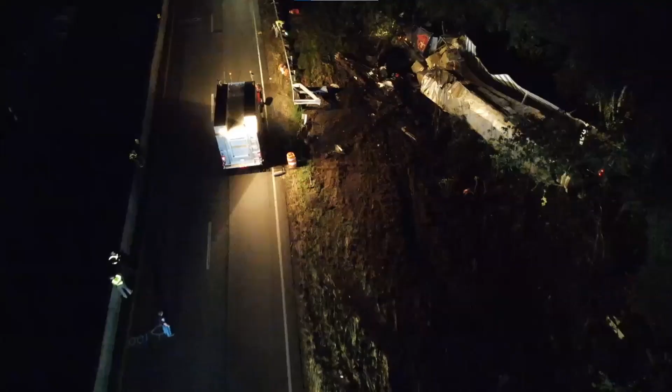Unfortunately, we had a dangerous work zone in Indiana back in the 2021 timeframe, and we looked at several crashes that happened in that geographical area. We had a bridge redecking that was occurring in that area, and the geometry of that site caused us to have several fatalities and serious crashes within a short timeframe.

This is one of the crashes where a semi ran off the right side of the roadway. Again, using UAS, we were able to go in there and within a 45-minute timeframe, collect all the images and accurately document that scene so that we could start on the recovery process and getting the roadway open back up.

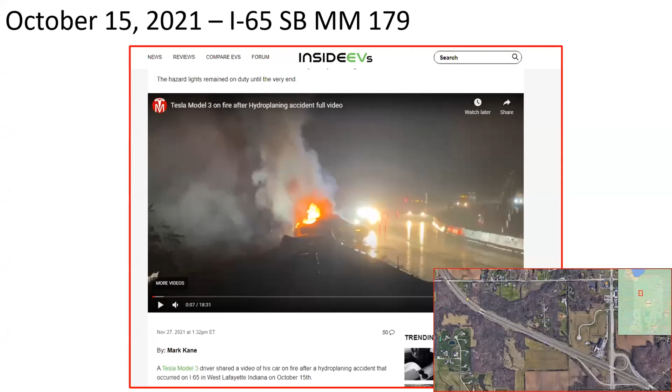Same evening as one of our incidents, after we had cleaned up that incident, a Tesla came into that construction area. It originally came in that they hydroplaned and crashed, or a vehicle fire. When we got there, we found out that the Tesla had entered that area - the navigation system got confused by the markings and struck the interior wall.

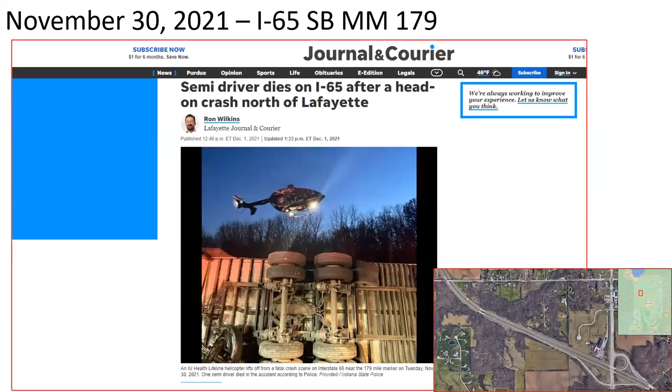Unfortunately, within that 2 to 3 month timeframe, we had several fatalities occur, all involving commercial vehicles, where we shut down that roadway for an extended period of time. Again, using UAS, we were able to quickly go in and document those large scenes very quickly, and then get in there and start the recovery process and start opening that roadway back up.

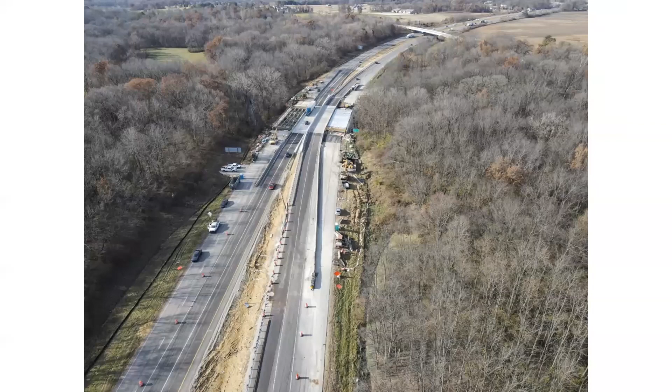So in using that, we obviously identified we had a problem in this area. We went out and flew that particular area in conjunction with the Department of Transportation and Purdue University's research program.

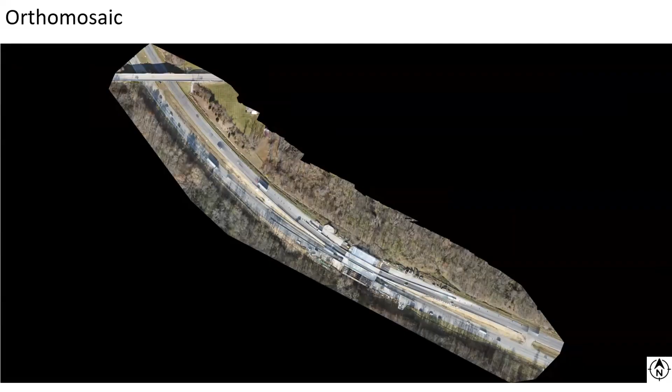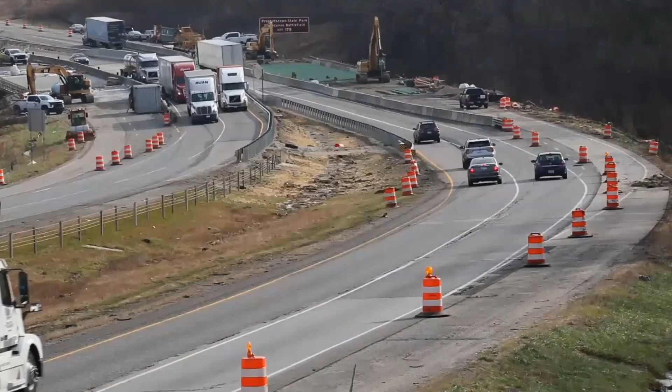We flew that area and mapped that scene as it was. This is a scene of how traffic was flowing through that particular area. We had a downhill left-hand curve going into a restricted bridge area. You can see how the semis are passing very closely as they come into that restricted area.

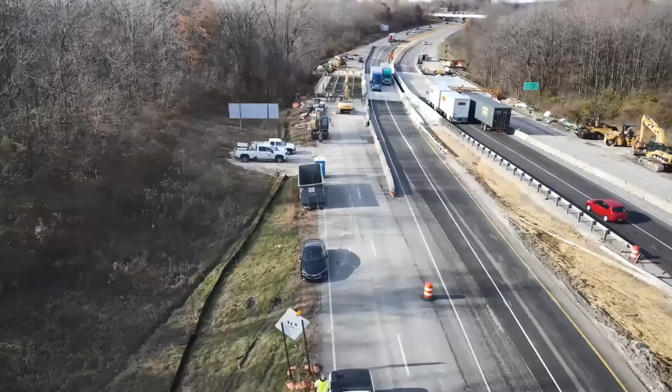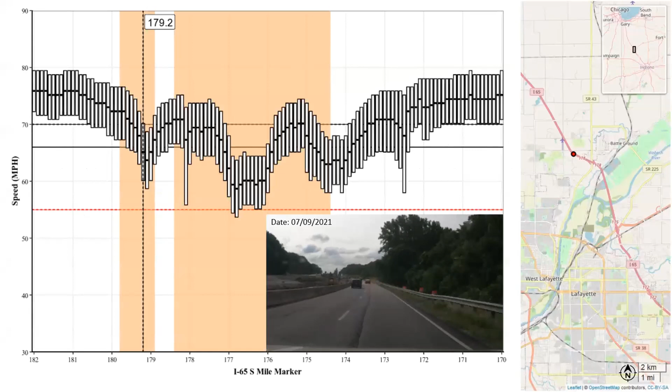So Purdue sent a LiDAR vehicle through there, using both the connected vehicle data and our UAS imagery, to then overlay that hard braking data.

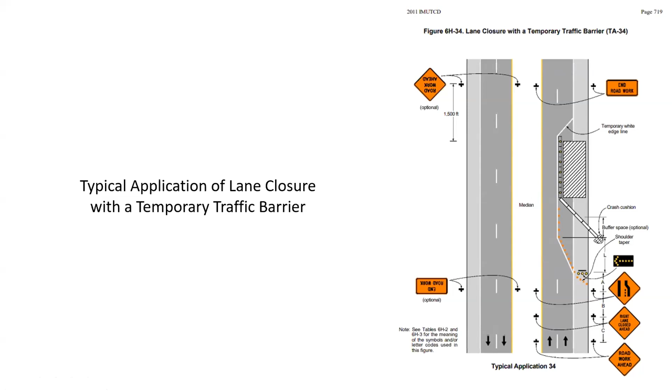As we know, the typical applications for lane closures and temporary restrictions or barriers for bridge redecking in those particular areas use standards that are typically used in the construction area. But what we were able to do is actually use the UAS flights to go in and document how the actual scene was, or how that area was.

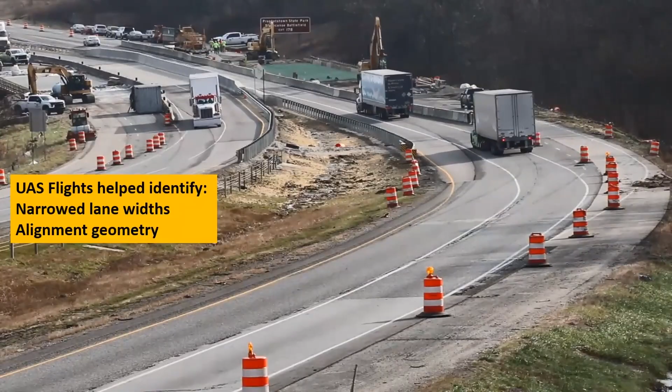Through that, we were able to identify that we had narrowed lane widths that had gone past what the restrictions were set up for, and they identified alignment geometry issues with that particular zone.

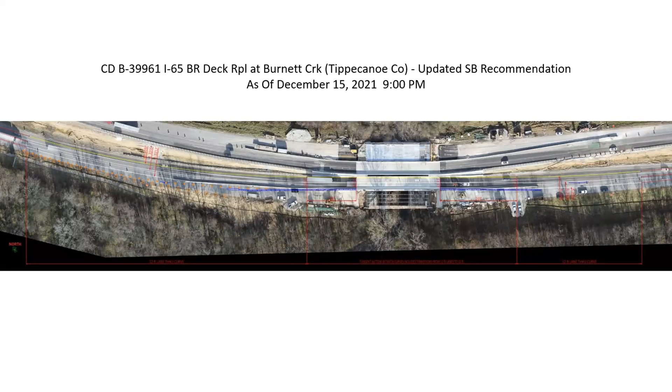So again, for the redecking, INDOT got with the contractors, looked at this information, and came up with recommendations that they implemented on December 15th for correcting some of the issues that they had identified.

One of the main things they looked at was the approach and transition into that bridge decking area. They realigned the traffic so drivers were coming into a straighter, lessened approach, as opposed to the severe curve they had experienced coming directly into that area.

They also improved the lane widths. They had found that the contractor had made the lane widths narrower than what had been allowed, and they corrected the lane widths to a 12-foot lane width through the curve area.

They improved the lane markings. The barrel patterns had initially been set out along the shoulder of the road, so they went in and added that visual barrier, that visual cueing for the drivers, and realigned the barrels so they followed the fog line or shoulder area more accurately into that transition.

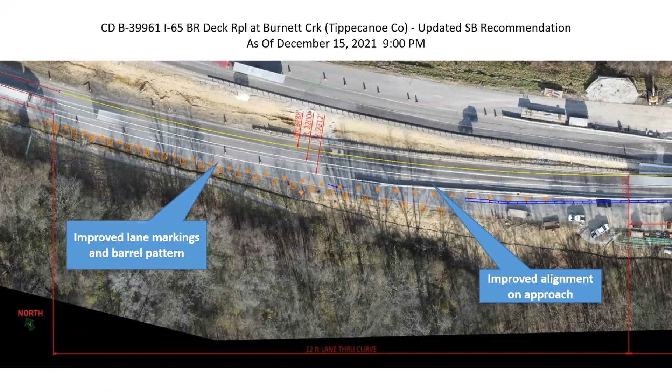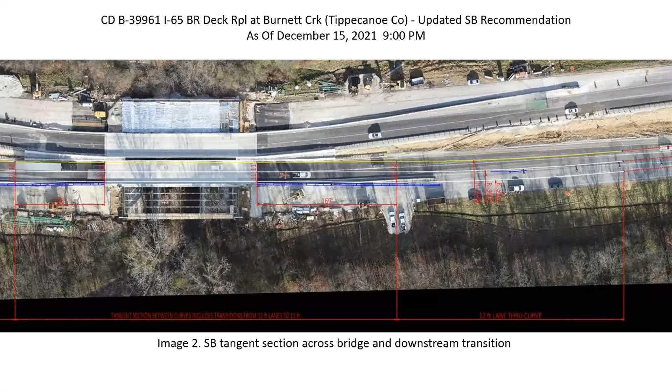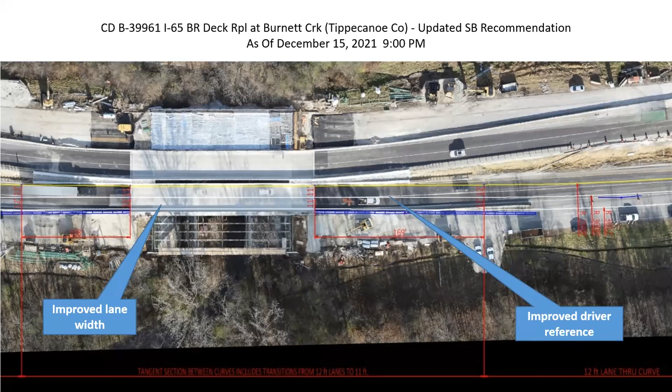They also looked at how the exit out of that area was. They looked at the section of bridging as they come across and then go into that downstream transition, again improving that lane width and giving drivers more of a visual reference as they navigated through that area.

We saw the results of that combination of UAV flights and hard braking overlay data — we had an immediate reduction in crashes, and that reduction continued through the entirety of the project.

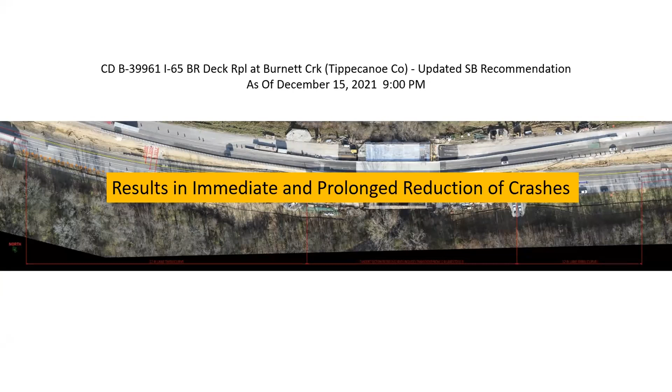So we looked at that model and asked, how can we use this in our other areas? The state has identified six major construction areas throughout the state of Indiana.

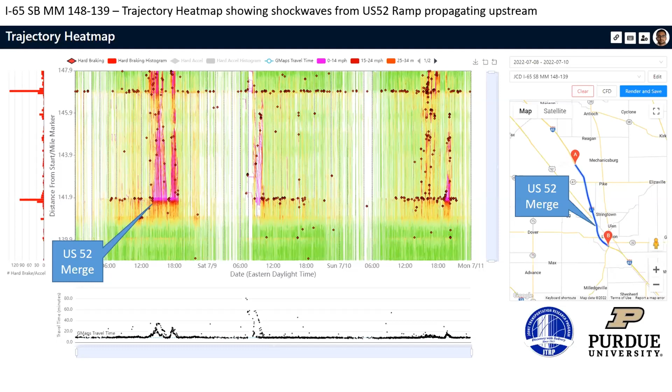In those areas, we've looked at the hard braking data associated with those construction sites. If they see a high incidence of hard braking or reduced speeds in those areas, Purdue will take this heat map data and identify where we need to go out and fly.

So we will go to those areas and fly them as the site is laid out, so that they can look at the geometry of those areas as well as overlay their hard braking data associated with that.

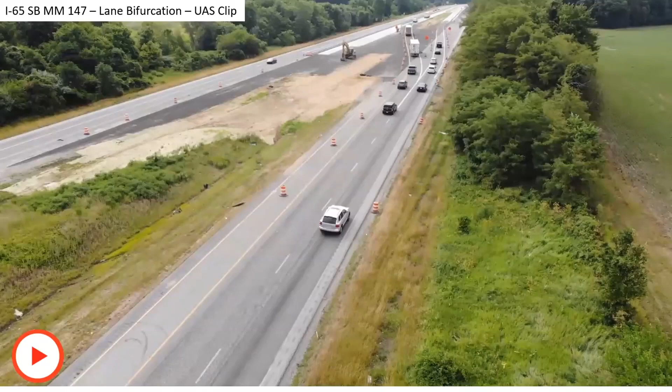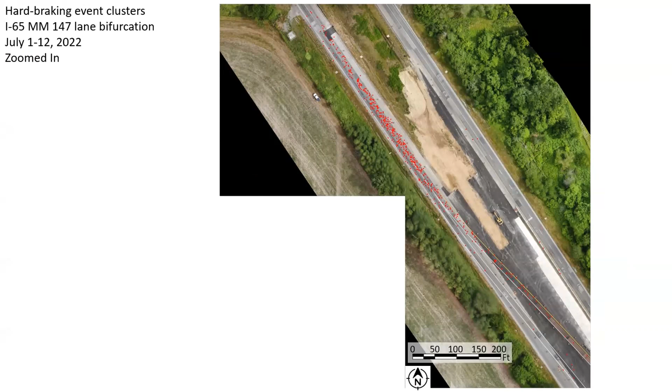So we began to analyze that. The nice thing about doing UAS flights is we get exact geometry, as opposed to using a satellite image from Google or other map sourcing. We're able to go in and actually fly the site as it's laid out and see where those events are occurring in relation to the true geometry of the area. In this particular area, we had the bifurcation area.

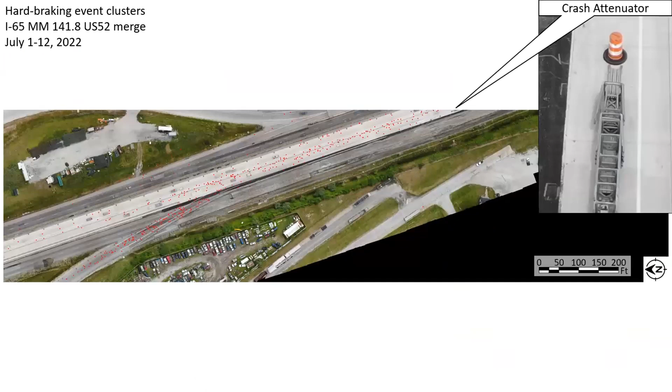The bifurcation area was created where US 52 merged into I-65, and that created challenges because drivers didn't have the normal transition area to merge into traffic. Plus, they were merging into one lane of traffic as opposed to two lanes as originally designed. So again, a good indication of where hard braking events are occurring in those areas.

Purdue University looked at hard braking events prior to this project and bifurcation going in. We see respectively for those areas 143 events on one side and 77 events at that ramp transition area. We see the huge increase in those events, and they worked with designers and crews to try to improve those hard braking and transition areas.

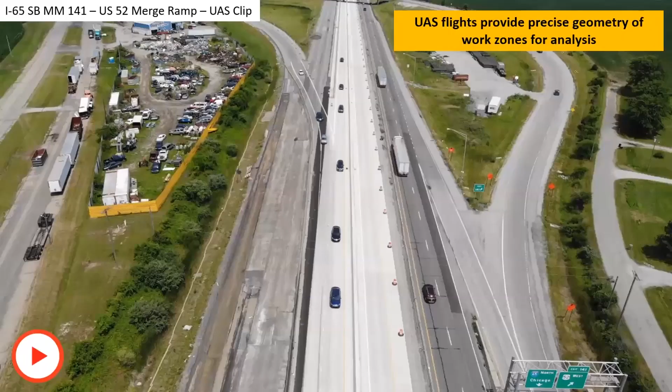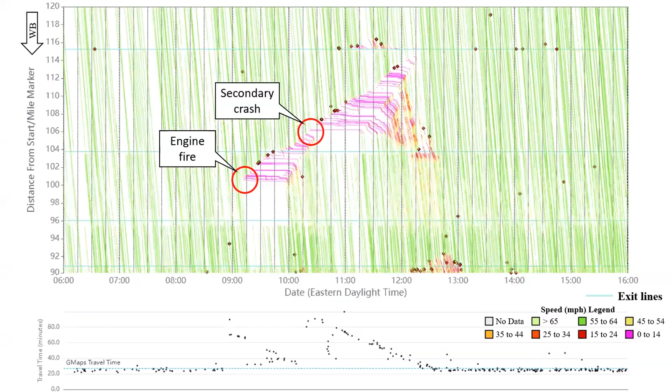So what we've transitioned to is going from mapping the work zones to now looking at how we can use the data for after action reports. Specifically, we're looking at how we can impact the TIM timeline, that T0 through T6 timeline. We're starting to look at both the heat map data, how traffic is impacted by these events, as well as how we can improve the times and analyze how emergency responders are on scene.

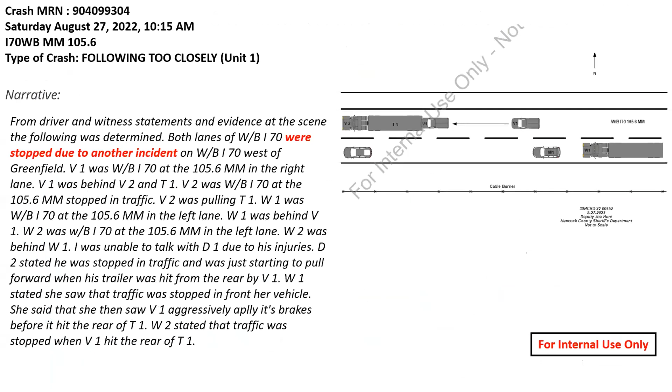In this particular case, we had a secondary crash that occurred just moments after the initial scene had been cleared. The queued traffic was starting to move as they opened up the area, and a secondary crash occurred. We're trying to identify if we could have opened that area up a few minutes earlier and avoided that secondary crash.

So again, looking at the CAD or computer-aided dispatch data from their responses, as well as the times from the Traffic Incident Management Center and the heat mapping, we look at how we can use these incidents to show first responders how they can better mitigate these situations without huge impacts on traffic flow.

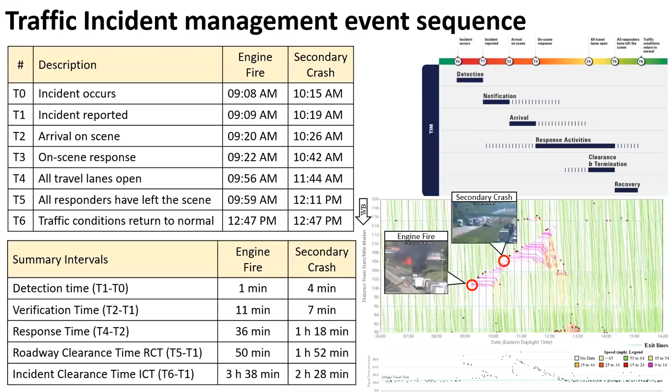Again, you can see here they cleared the scene, started to get traffic moving, and then we had the secondary crash occur. As we know, those secondary crashes are oftentimes fatal or very serious in nature, and that's what happened in this situation. So again, we continue to look at that.

Some things we continue to work on include work zone assessments and after action reviews involved with the responders. We're looking for good cases as well as cases where we can improve responder activities. Purdue University and the Department of Transportation are working to use connected vehicle data to automatically identify traffic slowdowns or incidents, so that it trains cameras placed throughout major corridors to those events and quickly notifies the TMCs so they can start their automatic alerting systems.

We're also working with dispatch centers to automatically provide, when there's a geographical location on the interstate for example, notification to the traffic management center of those incidents so they can immediately start notifying drivers.

Again, this program is piloted by the Joint Transportation Research Program through Purdue University in conjunction with the Indiana Department of Transportation.